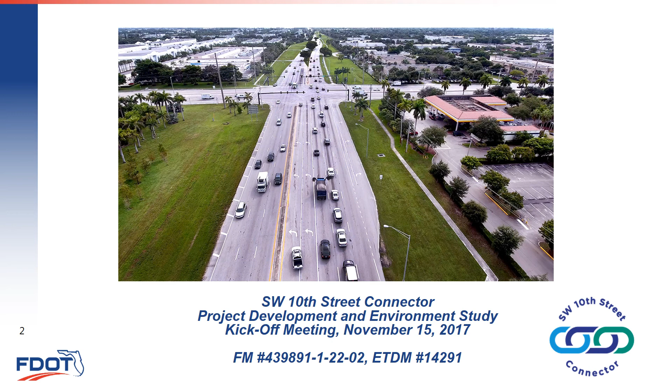Welcome to the kickoff meeting for the Southwest 10th Street Connector Project Development and Environment, or PD&E study. This project is being conducted by the Florida Department of Transportation under Financial Management Number 439891-1-22-02. Tonight we will discuss the Southwest 10th Street Connector PD&E study from the Turnpike Sawgrass Expressway to I-95.

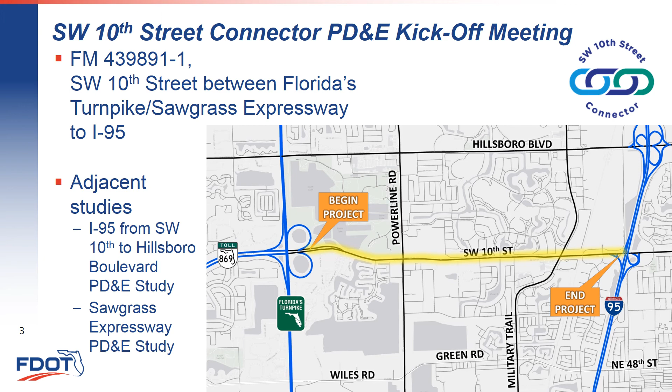While the adjacent I-95 and Sawgrass Expressway projects are being evaluated as separate studies, all three will be presented as one regional project encompassing the entire Southwest 10th Street corridor with connections to the Turnpike and I-95. Representatives from these adjacent projects are here tonight to answer any questions you may have relating to those specific studies.

This presentation will briefly review the Southwest 10th Street project history, the Metropolitan Planning Organization, or MPO, consensus study, activities that have occurred since the MPO consensus study, and describe the PD&E process and what will be evaluated as we proceed with the Southwest 10th Street Connector PD&E study.

Regional transportation planners recognized the need for improved transportation facilities in northern Broward County in the 1970s. In the early 1990s, FDOT completed a PD&E study to connect the Sawgrass to I-95 along Southwest 10th Street. The project was not advanced, however, mainly due to community concerns. In 2008, the Southwest 10th Street corridor underwent another feasibility study, but the project had little political or community support, and once again it was not prioritized. Meanwhile, the traffic, safety, and operational issues along Southwest 10th Street continued to worsen.

Realizing that some type of improvement was needed, the Broward MPO formed a consensus building team in 2015. This consensus building team was named the Community Oversight Advisory Team, or COAT, which consisted of 15 members from the cities of Deerfield Beach, Coconut Creek, Coral Springs, and Parkland. The team also received technical input from various county and FDOT representatives. The COAT's purpose was to formulate a vision for the Southwest 10th Street corridor that was acceptable to the community. The COAT also compiled a list of 18 recommendations to be examined in the PD&E study.

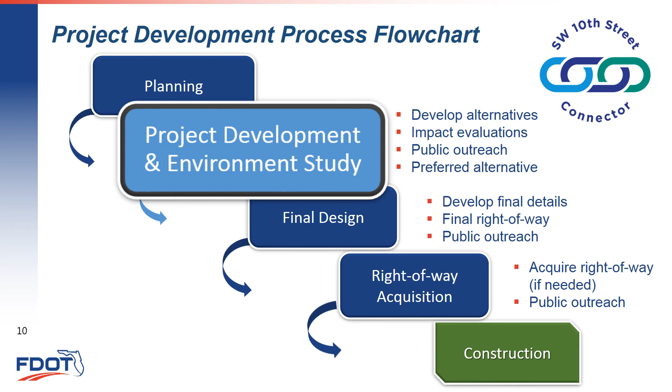A project development and environment study is the step after a planning study, but before a project enters into the design phase. A PD&E study must follow National Environmental Policy Act or NEPA requirements. During the PD&E study, all social, environmental, and engineering analyses are performed and documented regarding the proposed transportation improvement. These analyses will support decisions regarding basic design concepts and identify a preferred alternative.

Since a PD&E study is not a final design project, some elements are developed to a conceptual level of detail and must be further coordinated later in the design process. Public outreach is a very important component of a PD&E study and also supports the project recommendations.

A continuous community outreach process is integrated into every step of the project to ensure that corridor residents, businesses, the traveling public, and other interested parties have opportunities for participation and meaningful input throughout the PD&E study. There will be various opportunities for you to provide your feedback.

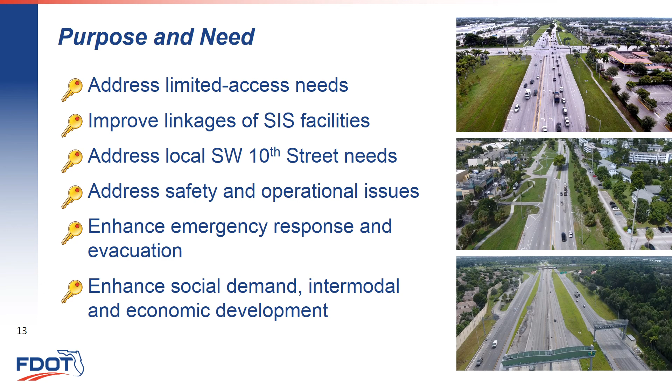As illustrated here, the Southwest 10th Street corridor represents a gap in the existing and future regional express lanes network. This corridor is an important SIS link between the Turnpike and I-95. The Turnpike and I-95 are the backbones to the north-south movement for people and goods throughout the state of Florida. Implementation of an express lanes corridor roadway, along with an improved local roadway along Southwest 10th Street, addresses other key COAT recommendations and will complete the regional network and promote mobility and economic vitality of the area.

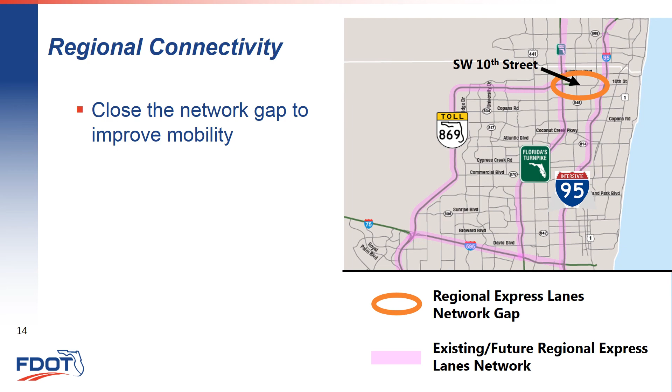The crash rate along the Southwest 10th Street corridor is higher than the state average. On average, there are 103 crashes with 105 injuries yearly. These crashes represent an economic loss of approximately $15 million per year. 3 intersections, Powerline Road, Southwest 24th Avenue, and Military Trail, are on the state's high crash location list.

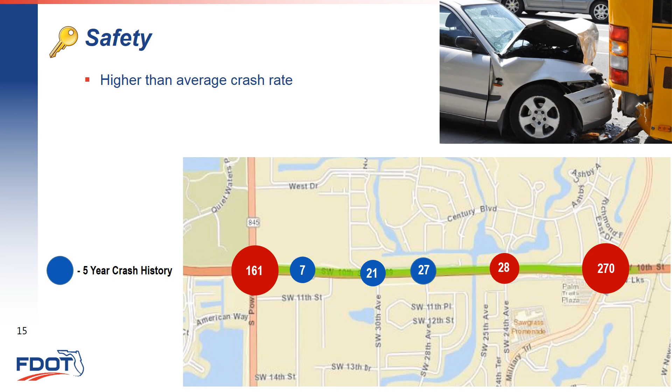Operational issues must also be addressed with any proposed improvement. Current traffic patterns indicate heavy eastbound traffic in the morning that backs up onto the Sawgrass Expressway. In the evening, westbound vehicles spill back onto I-95. Current level of service, or LOS, is measured from A to F, with A being the best or most efficient traffic flow, and F representing the worst traffic flow in congested conditions. The Southwest 10th Street corridor overall operates at an LOS of F.

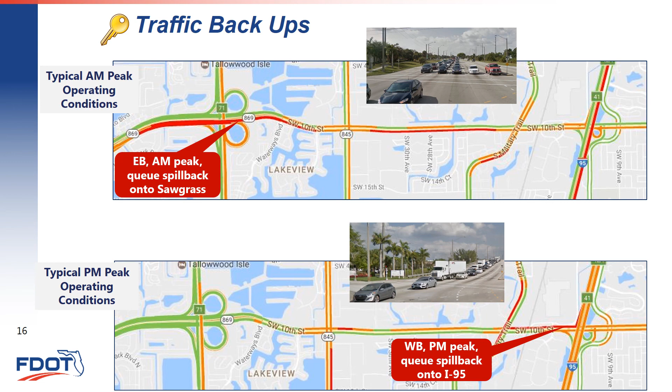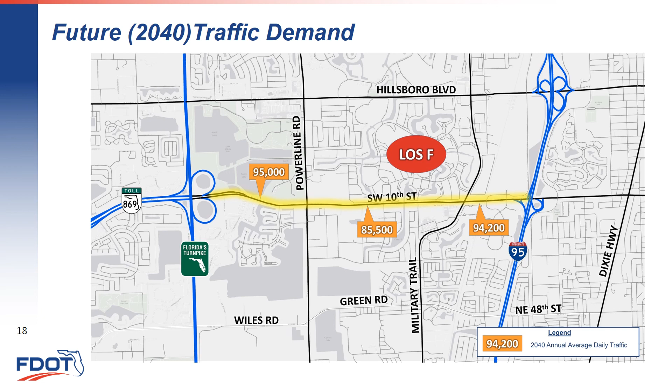The team will evaluate 2 facilities within the Southwest 10th Street corridor. One will be an express lane facility to provide a connection between the Turnpike, Sawgrass Expressway, and I-95. Concepts will be evaluated with different entrance and exit ramp locations between Powerline Road and Military Trail for access to and from the express lanes and local Southwest 10th Street.

The extent of the below-grade section is being evaluated for the express lane facility and will continue to be developed as the study progresses. The other facility will be a local, lower-speed roadway to serve businesses and communities within the corridor. Bicycle lanes, sidewalks, and other community elements will be evaluated.

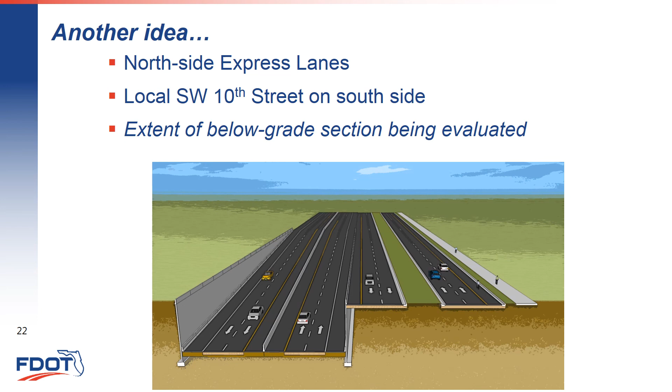Another concept under development is a northern express lane alignment. This concept locates the local Southwest 10th Street facility on the south side of the express lanes. This alternative is also being evaluated with a below-grade section.

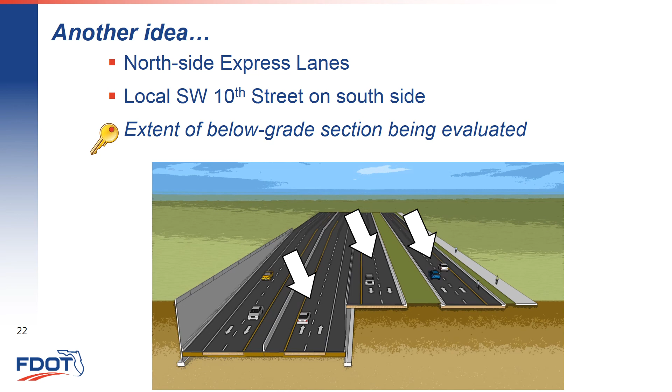Each build alternative will be evaluated as it relates to the natural, physical, cultural, and social environments, with the goal being to avoid or minimize impacts to these resources. Results of the analyses will be documented and reports prepared and available at a later date. Multimodal accommodations such as park and ride lots and transit will be taken into consideration during this study.

Noise is a key concern for the communities surrounding the corridor, and a robust noise analysis is being performed. There are 7 residential communities, 3 recreational sites, and 1 commercial site that are noise-sensitive areas. Noise levels will be measured at various locations along the corridor and an analysis performed for each of the concepts.

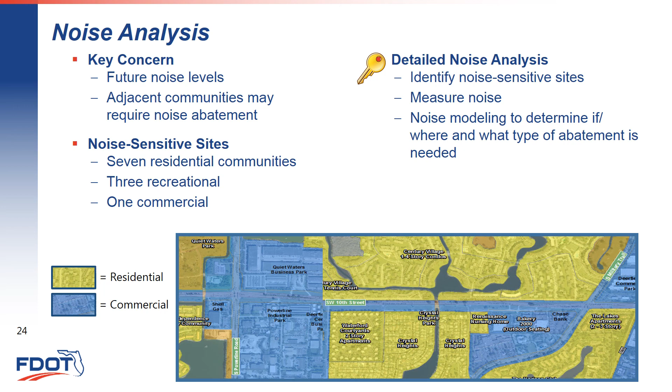Each alternative will be evaluated to determine if, where, and what type of noise barrier would be the most appropriate for the impacted areas. Noise walls, if required, will be closely coordinated with affected stakeholders.

The FDOT has already planned and funded 2 future landscape projects with ample budgets to address aesthetic elements along the corridor for installation immediately after construction of the roadway improvements. As the PD&E alternatives are developed, landscape design concepts will be developed and coordinated.

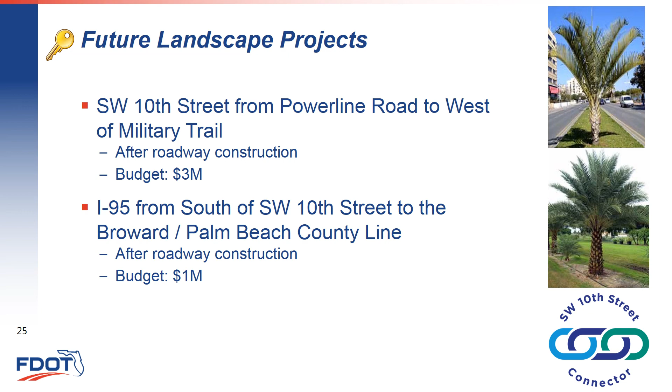Each of these meetings represents additional opportunities for you to offer feedback. Location and Design Concept Acceptance, or LDCA, signifies the end of the PD&E phase and is scheduled for early 2019. Continuous public involvement is included in the PD&E process.

As we move forward, alternatives will continue to be developed and refined, and environmental evaluations will be conducted. Public outreach will be continuous throughout the study, and interested groups are encouraged to contact the project team, who will be available for group meetings. The team looks forward to meaningful stakeholder engagement during the PD&E process and welcomes all input.

The Alternatives Public Workshop represents an additional opportunity for you to provide your input and feedback to the team on the engineering concepts being developed. The public hearing is another meeting where you can provide your comments.

This project is currently scheduled to begin the final design phase in the spring of 2019. Currently, construction funding is in 2025, but FDOT is working hard to advance funding to get this important connector constructed in order to complete the regional roadway network.